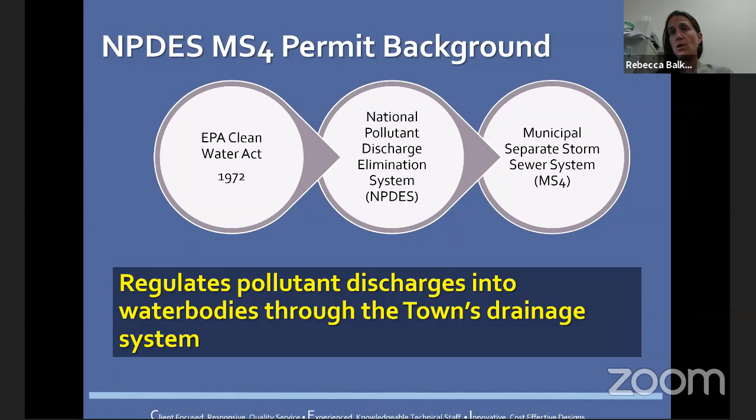So your town currently has what is called an MS4 permit for your drainage system. The MS4 permit itself has 6 minimum measures that they require all permittees to meet. Just to give you a quick background, those 6 include some public education requirements. There's an illicit discharge detection and elimination piece, which I have highlighted here in black text. The 3 items in black text are the regulatory pieces, or have some regulatory pieces associated with them. So that's one of them.

Construction site stormwater controls and regulations is another piece. We'll get more into those in a few minutes. The post-construction site stormwater controls is another one, and then some good housekeeping requirements that would apply to different facilities throughout the town, as well as things like street sweeping and catch basin cleaning.

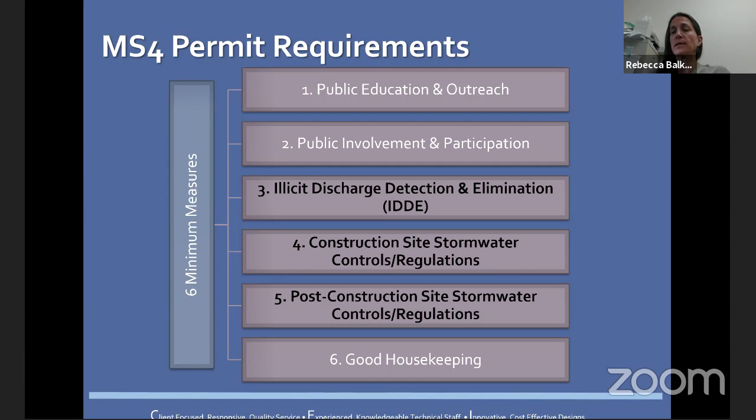So in terms of the regulatory requirements, the MS4 permit has some specific components.

The first is illicit discharge detection and elimination. Under that, it requires communities to have a regulation in place that basically prohibits any illicit discharges into your drainage system and allows for enforcement of those.

This was a requirement under the first permit that came out in 2003. The permit was updated in 2016, became effective in 2017. They still have those same requirements in there, and they didn't really change the requirements too much for those.

The second regulatory piece has to do with construction sites. The purpose of this second piece is to require any construction that disturbs an acre or more to implement erosion and sediment controls on their sites.

This requirement was also part of the original 2003 permit and didn't have a lot of significant changes in the updated MS4 permit, but it's something that we took a look at while we were looking at other components.

Then the last piece is post-construction stormwater controls, and that is regulating land disturbance greater than or equal to an acre, same as the construction site.

The purpose of that is to have controls in place to treat stormwater runoff after development takes place. You'll have new impervious surfaces, you'll have more stormwater runoff. How is that being handled so it's not increasing pollution to surface waters, that's what it's looking for.

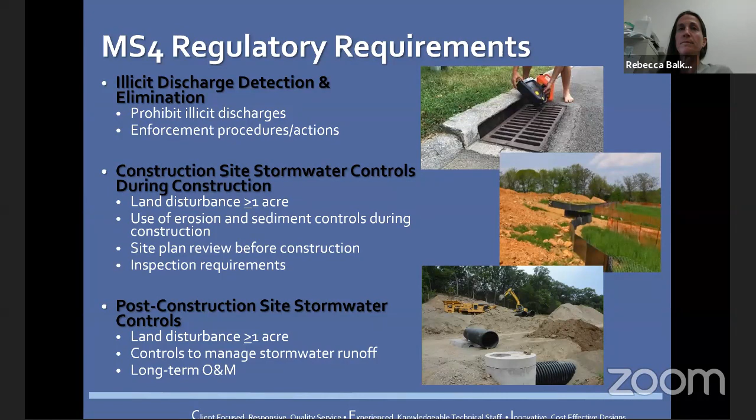So Yarmouth's regulatory mechanism is really found - all 3 of those components are found in Yarmouth's Chapter 145 Stormwater Management Bylaw. It covers the illicit discharge piece as well as the construction and post-construction requirements.

We did look at that in 2019, and the bylaw itself was updated, and most of the updates were really just to kind of clean things up and really get the authority enforcement requirements into the bylaw and out of the regulation. So now we are working on the regulation.

The regulation is required to be updated by June 30th of this year under the existing permit, but they are proposing to extend that to next June, basically June of 2021.

But basically the requirements under that - your regulation currently meets the 2003 MS4 permit requirements. The updates are required to meet new requirements in the permit, which are just basically more prescriptive.

Before there were a lot of loose and vague items, and they pretty much left it to each municipality to come up with their own regulation. Now they have very specific requirements that they want to see in your regulation. That's kind of what we want to talk about today - what some of those are and how we're incorporating those.

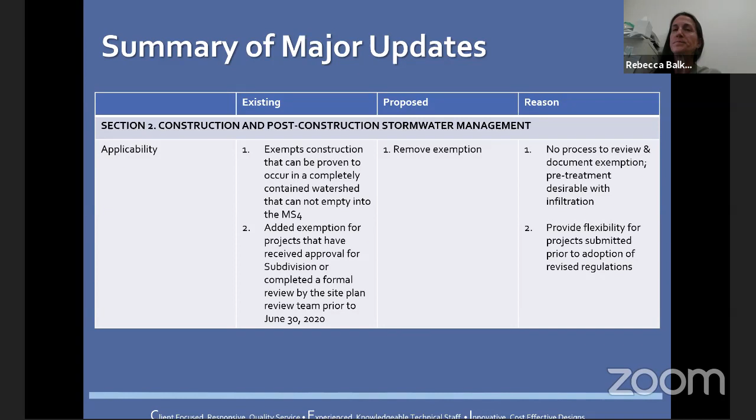That stormwater group consisted of various people from the town as well as CEI, just kind of going through and walking through the different requirements. So some of the things that were added were to require retaining of the 50-year storm. They're already required to do control of that under the Massachusetts Stormwater Management Policy, or handbook, I should say, and it's something that's kind of expected when people come in for subdivision applications as well. So we just kind of wanted to clarify that.

We added a pretreatment requirement to remove 44% of TSS, that's total suspended solids. So where infiltration is used quite a bit down at the Cape, we wanted to make sure there was some pretreatment for that, so things weren't just going directly into the groundwater. That's what was used, and it's consistent with the stormwater management handbook. This will require it for any infiltration as opposed to just those that are in certain areas, for example.

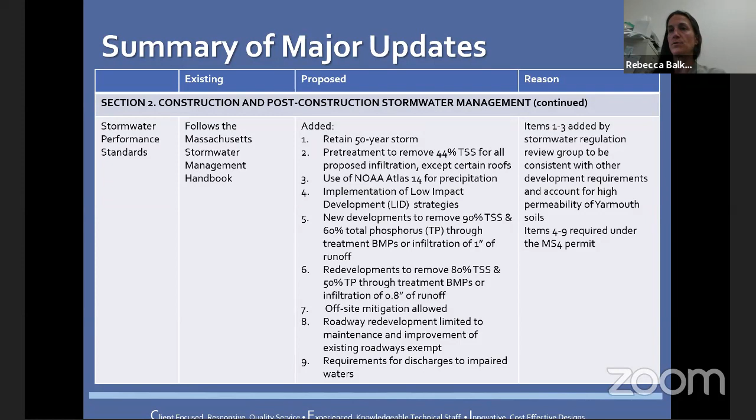Under the final reports, you currently have a requirement to submit as-built plans, but there's no timeline in there for that. So we did add a timeline to say that as-built had to be submitted within 3 months of completing construction. It's really just to put an end line for that. So those pretty much sum up the requirements, and I think those are the majority of the requirements from the MS4 permit that go into that section 2 area.

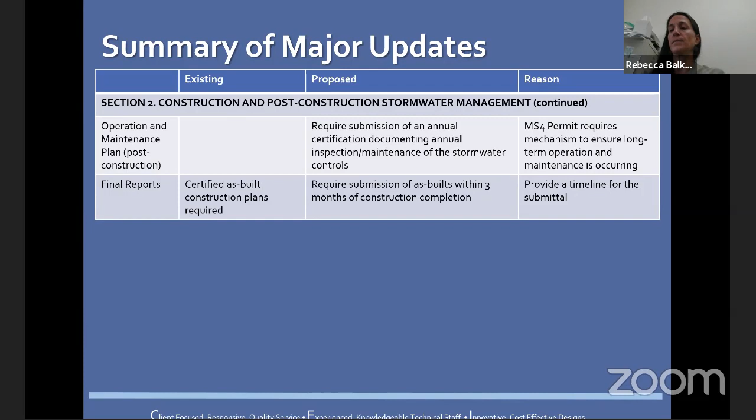We've had separate discussions with DPW and are working on doing some guidance basically for people that have sump pumps. The town wants to avoid people just having hoses that run across their property and then discharge onto the sidewalk and into their system, because it creates other issues. In the winter, you can have freezing conditions. So we're trying to handle those through other methods, basically.

And then we also added some conditions for dechlorination, because discharge of swimming pool water is allowed, it's exempt from being an illicit discharge as long as the water has been dechlorinated. So we really just beefed that up a little bit to outline what does dechlorination mean, what do you have to do to meet that dechlorinated water standard.

The other thing we did for the emergency suspension of storm drainage system access, similar to the other sections, we added that the Department of Municipal Inspections and also DPW had the authority to issue suspension orders, because they currently already deal with a lot of the illicit discharge issues that may come up. So that pretty much summarizes what we did to those regulations.

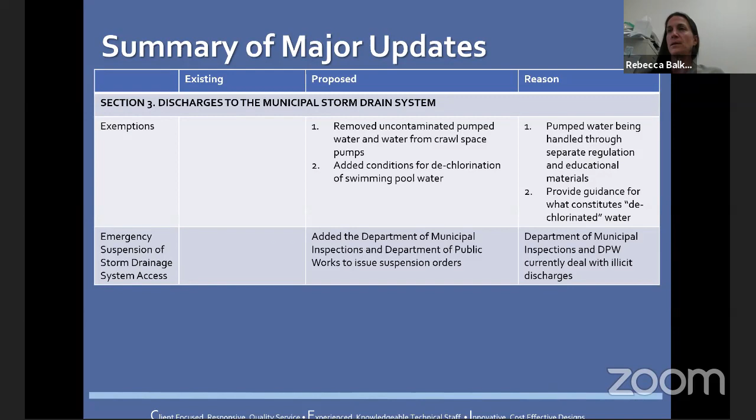I tried to really focus on highlighting the things that were significant, or the more major changes. Everything else, there might be a little bit of formatting and maybe a couple other things moved around, but it didn't really change the content of things.

So I guess I just want to open that up for questions now, if you have any.

Okay, thank you, Rebecca. Any questions from the commissioners? Yeah, I have a... trying to find raised hands. I got it, that's okay. Go ahead, Tom. Rebecca, thank you very much.

You mentioned in section 2, the decontamination of water, particularly as far as phosphorus is concerned. What about the nitrogen? The MS4 permit currently only requires a percentage removal for phosphorus. It doesn't require anything for nitrogen.

We could certainly add something if that is something that the town wanted to do. So right now, the only requirement for nitrogen is if you're going to be discharging to a nitrogen impaired water, the language in there is just that they have to optimize their BMPs to also remove nitrogen. And it's kind of left vague, so it gives the commission a little flexibility to determine what you want to see for that.

You certainly could put in a removal requirement. They did do that in New Hampshire, actually. EPA did put in a nitrogen removal requirement for the Great Bay communities only in the New Hampshire permit. So we didn't want to go more stringent than what the MS4 permit required at this time.

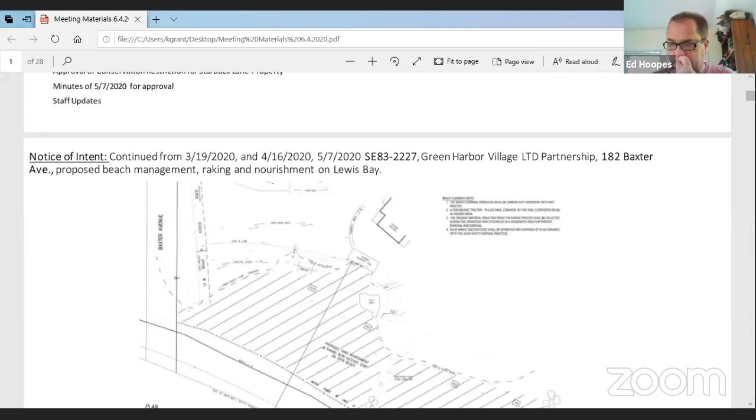Kelly, we have our natural heritage comments, is that right? That is true, yeah, we do have the natural heritage comments, and so recommend that those be included in the order of conditions.

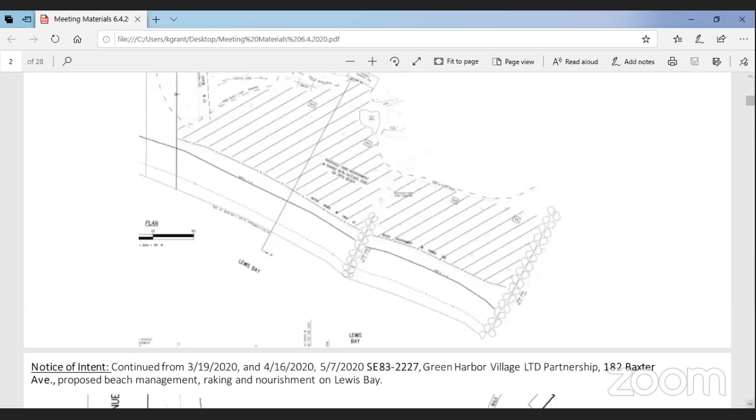All right, is there somebody representing? Bob Perry, you can go ahead. Hi, Bob, didn't see you there earlier. I'm here to answer any questions if you have any.

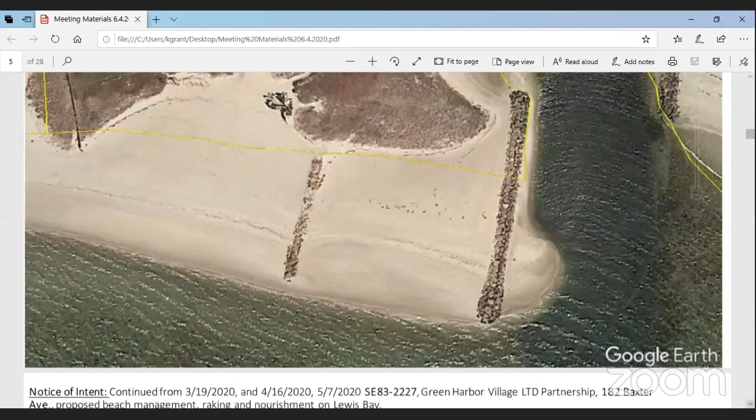Okay, thanks. I'm going to turn it over to the commission. Anybody in the commission have any concerns, comments, questions? Raise your little blue hand if you do. If not, it doesn't look like it. Kelly, do you have any comments or concerns?

The only comment I would make is that the notes on the plan should match the conditions in the order, rather than the statement that the work would be done as it had been done in the past. So if we can just update the notes in the plan to reflect the conditions within the order.

Kelly, would you like that? We could drop off two stamped hard copies, or one? One hard copy would be fine, thank you, and an electronic copy.

And as I understand it, the comments of the NHESP are incorporated into the order as written. That's right. Okay, we're on board with that.

Kelly, the only other question we had was we still have concerns about equipment on the beach. I don't think we should handle it here, but do we have further comment or questions on that? No, the equipment on the beach and the work done outside of the permit is still an issue to be resolved. If you want to address it separately from these hearings, to allow the permits to be issued so they can go ahead and do work, and then address the violation separately, that would be one way of doing it.

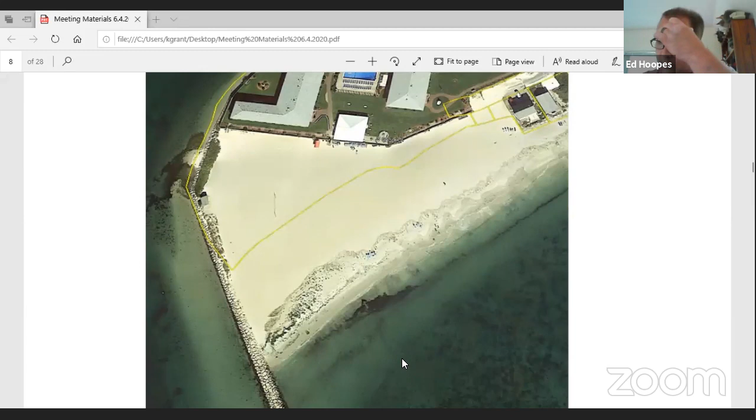I haven't even read it yet, to be honest with you. I can run through it. Well, is everybody else comfortable with it? I can tell you, summarize, it's one page, but here's our thinking.

We are proposing that fenced area, which is an equivalent area to the dune, and we went back about 12 years to get the size that it was. So that dune area is already exhibiting a heightened terrain. As soon as the order of conditions is available, the fence goes in—there's no lag time. In our opinion, and I think you'll agree, a natural dune will be more stable with wind-bedded sand. That was our premise, and between now and December we believe that dune will grow in there.

And it will be December when beach grass would be planted as soon as we possibly can, two culms per hole, 12 inches on center. If there's an indication that more sand needs to be added, then more sand will be added before the grass is planted. The dune will then continue to accrue volume, and we don't know exactly how it will behave, but my experience with dune growth, when we built dunes before either with Christmas trees on the beaches or snow fence, is you will see an increase in the elevation of the beach.

So that fence is standard snow fence. It will be neat. The establishment would certainly want to have a neat snow fence. It will remain there. I think that's one of the problems with the former dune.

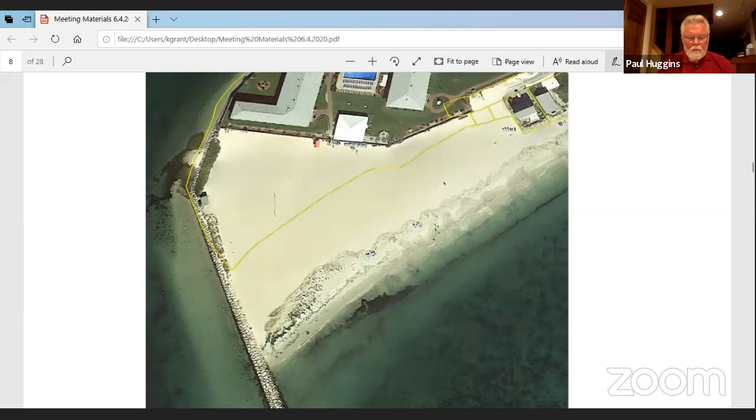Again, Bob, you're in the audience for this, and same issues again, right, Kelly? That is correct. Sorry, I can't keep up with the slides. I'm sure everyone's seen the pictures already. This is more analogous to Red Jacket. There's no dune development here, and NHESP is mirror image for the others.

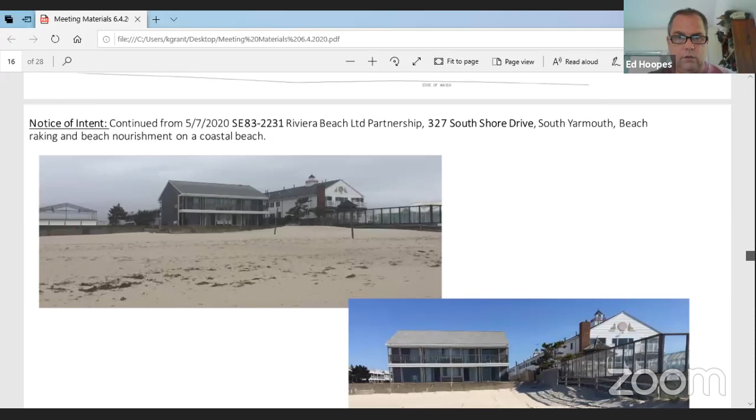Okay, and we still have that. So there's an enforcement issue with this one, especially with removing that build up there. I think we should handle this one the same way as we did the previous hearing. I don't see anything wrong in closing this hearing out tonight, but I think we should also put this site on the enforcement track as an agenda item for next meeting.

Just to clarify, the previous property was also the subject of enforcement, right? So we're going to have 2 properties? Because we voted on the first one already. I thought we didn't have to worry about the enforcement issue with that one. Oh, I'm sorry, I thought you were talking about the enforcement issue with regard to the dune. But the enforcement issue with regard to the equipment on the beach 2 weeks ago is unresolved. So yeah, sorry.

Right, so we could have a motion to pursue enforcement for both of those properties within one motion at the next meeting, if you want to do that. Okay, so let's take care of the motion for approving beach raking and nourishment first, and then we'll finish up with the 2 motions, or 1 motion, for the 2 enforcement issues after we close this portion of the hearing. Does that make sense? Yeah. Okay.

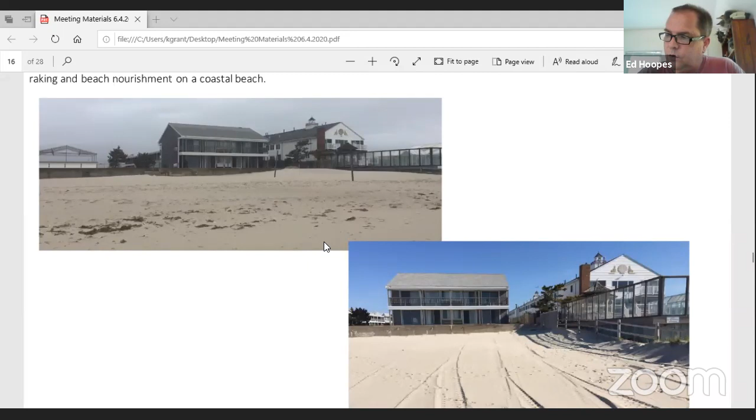All right, thank you, Kelly. Next order of business is another continued notice of intent, continued from May 7th and May 21st, 2020, for SE 83-2228, William McDermott, for 5 Salt Meadow Road, West Yarmouth, raze and replace of an existing single-family dwelling with appurtenances. And I believe that's Lynn, is that right?

Oh, thank you, Bob Perry. I forgot to say thank you. No, thank you, Chairman. Thank you and the commission.

All right, is Lynn there? Can you hear me? We can hear you. Can you see me? We can't see you. Okay, I just like to be oriented. Good. Thank you. I'm representing WSMI Development LLC. Other property or project proponents might be here, but I can't see them either. So I'll just go ahead and do the presentation, and if there's a question I can't answer, perhaps the PE or the applicant is here. This application is for the raze and rebuild of a single family dwelling.

We asked for a continuance initially because we wanted to address the concerns of both your administrator and the neighbors who contacted me. And we thought we would make those changes to the plan or address those concerns before presenting the application to the full commission.

So the plans that you got originally really haven't changed. What's changed is the preservation of the perimeter vegetation on the property. The only wetland resource, BVW resource, is a salt marsh across from Salt Meadow Road. The property is actually 64 feet away from it. The only construction existing or proposed is the slab, which is a little basketball court, proposed to be demolished. The rest of the property is within land subject to coastal storm flowage only.

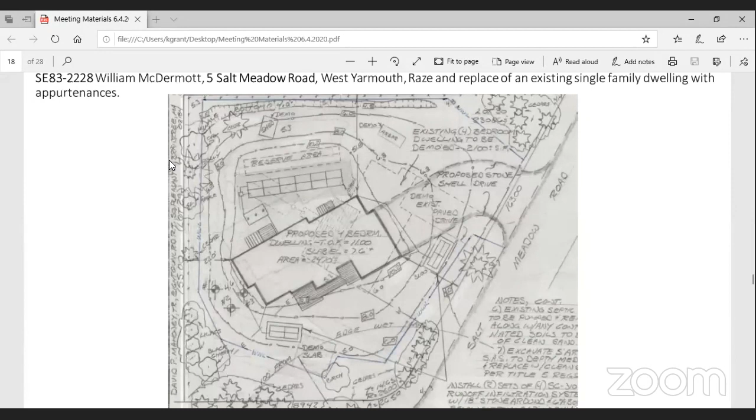This is Pat. I'll make a motion to issue an order of conditions approving this project at SE 83-2228 at 5 Salt Meadow Road with the conditions as provided by the Conservation Administrator and any additional conditions. Okay, thank you. Is there a second? Second, Ellie. Ellie seconded. All right, Kelly, if you'd call the roll, please.

Bishop, Aye. Durkin, Aye. Bernstein, Aye. Lawrence, Aye. Hoopes, Aye. Huggins.

Sorry, did I miss that? Huggins? He's still on mute. Paul, I see you. Aye, there we go, sorry. And Mulhern, aye. Motion carries unanimously.

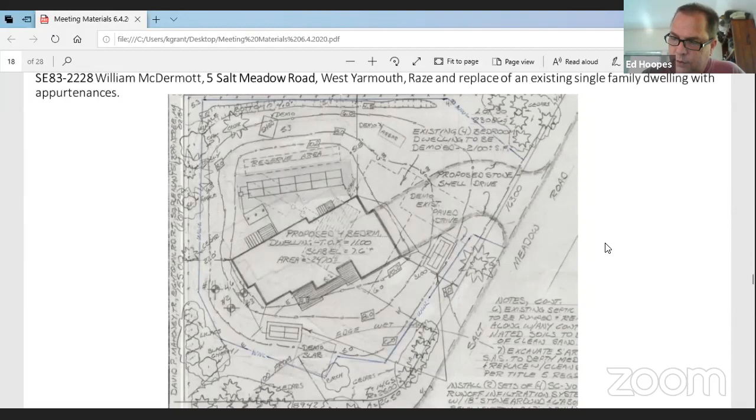And I believe we were looking for an updated plan with more mitigation planting. Is that right, Kelly? That is correct, and we have received that. We received an updated plan with 200 square feet of mitigation area. Okay, and are you good with that? I am good with that.

All right, any discussion amongst the commission? Anybody in the audience who have any comments or concerns with this? If not, may I have a motion?

Hi, Bob Perry. Just wanted to chime in, we also submitted some information that was requested, and you have it if you wanted it. It's nothing more than a comparison, and there was quite a bit of building removal from the 50-foot buffer, so we put those details in the letter. Okay, yeah, I mean, you were representing them, right, Bob? Yes. Okay, all right, thank you, and just so noted.

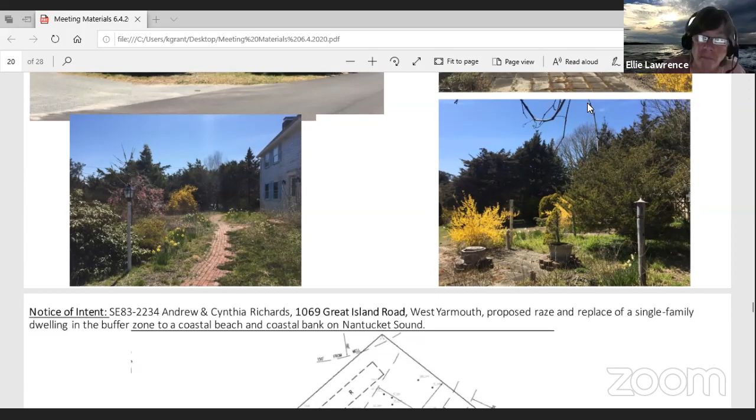All right, is there a motion to issue an order of conditions? So moved, Rick made the motion. Is there a second? Second, Ellie. Ellie seconded. Kelly, would you please call the roll? Bishop, aye. Durkin, aye. Bernstein, aye. Lawrence, aye. Huggins, aye. Mulhern, aye. Motion carries unanimously.

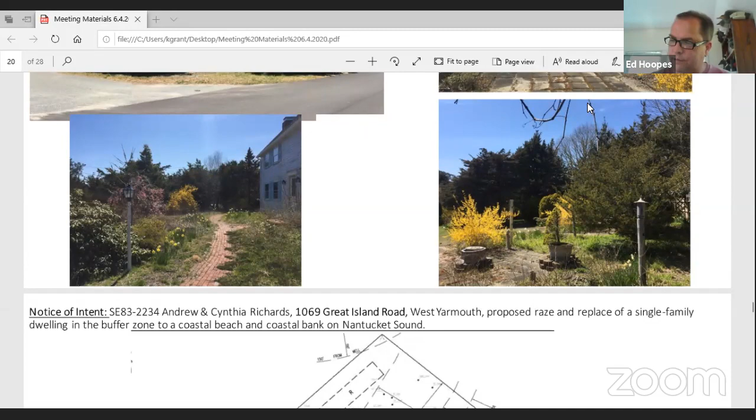All right, next order of business is a request for an amended order of conditions for SE 83-2041, Jeffrey Chizmas, 66A River Street, South Yarmouth. Request to amend an existing order of conditions with regrading of mitigation area to reduce stormwater runoff.

And I believe we had asked for an updated plan showing those contours, and we have gotten, I believe, everything that we were asking for at this point, right, Kelly? Yes, we have received a plan which you should all have a copy of, and I'm showing on the screen, which shows the contours onto the neighboring property and the proposed changes to those contours. It also shows the area of vegetation that will be replaced, and there are details as to what they will be replaced with. So yeah, we have a good level of detail now as to what the proposed work is.

All right, I'm good with this. Anybody on the commission have any comments or concerns? I do. Tom, go ahead.

Kelly, will you be having the opportunity to make sure that these mitigations have been accomplished? Will you be visiting after a certain period of time? Yes, well, the property owner will need to apply for a certificate of compliance once the project is complete, so the commission and myself will have the opportunity to review all of the work and the mitigation plantings. If you want to set a time frame within which those plantings are put in after the regrading is done, then certainly that's something you could do just to make sure it's done in a timely manner.

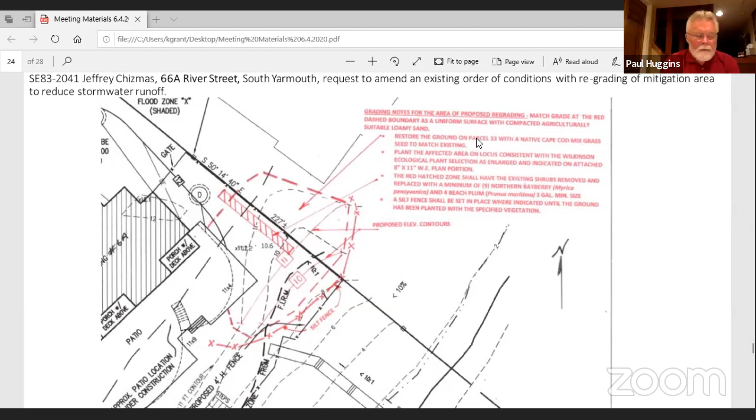Kelly, would you call the roll, please? Bishop, recuse. Oh, sorry. Durkin, aye. Bernstein, aye. Lawrence, aye. Hoopes, aye. Huggins, aye. Mulhern, aye. Motion carries 6-0 with one recused.

All right, thank you, everybody. Moving on to other business now. We have a violation for 4 Glenwood Street.

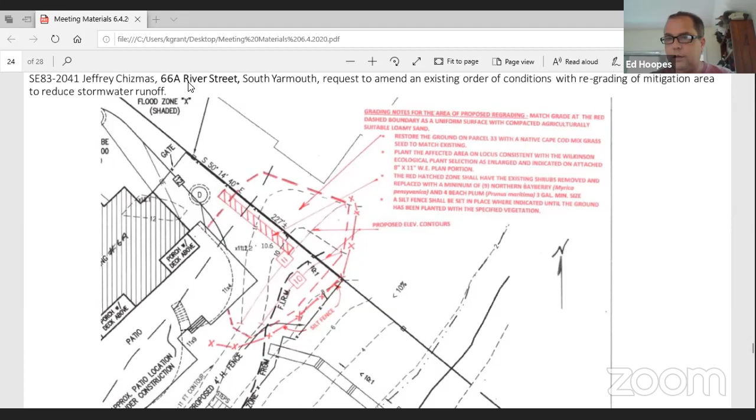Call from Jess. Who's calling me? Popular guy. All right, Kelly, you want to go ahead with the 4 Glenwood violation?

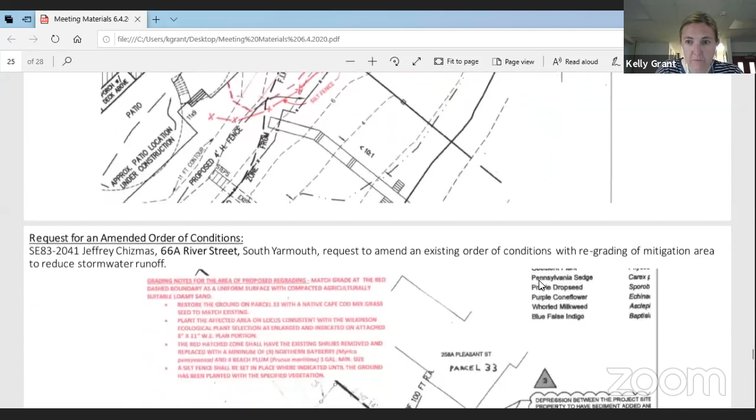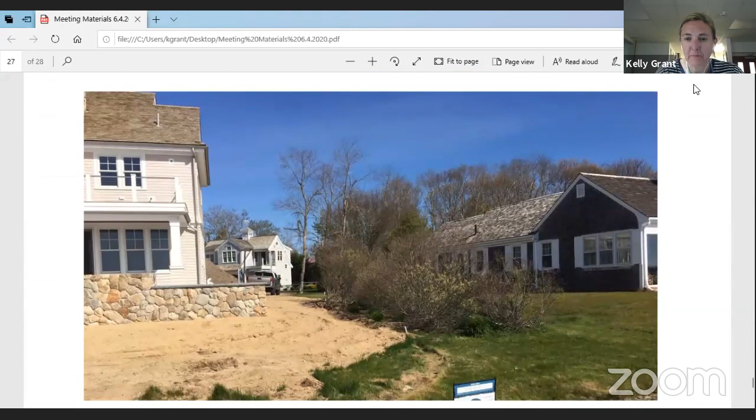And I understand that the property owner is in attendance. I asked him to attend to discuss the violation with the commission, so you could decide what the next steps would be.

All right, is the homeowner available? You can go ahead and speak. I'm not sure he's connected. It looks like his phone is trying to connect.